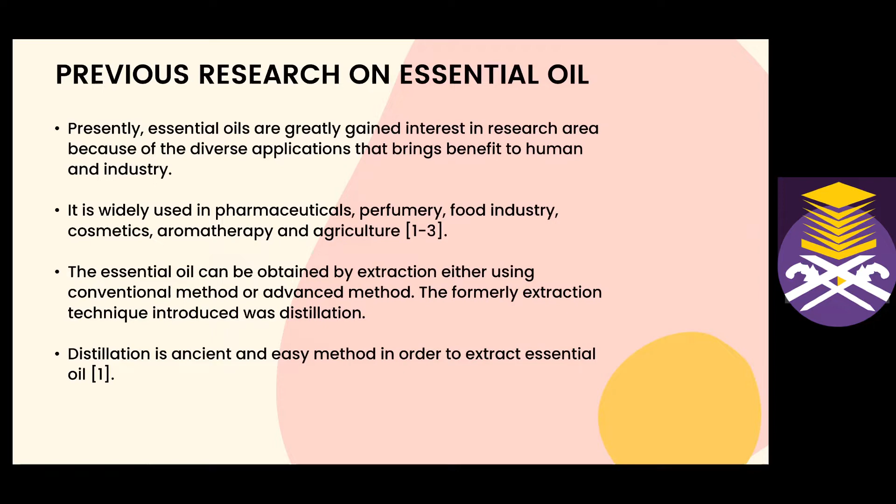The essential oil can be obtained by extraction, either using a conventional method or an advanced method. The earliest extraction technique introduced was distillation. Distillation is an ancient and easy method to extract essential oil. Therefore, distillation is categorized as a conventional extraction that can be accomplished by using hydro or steam distillation.

Okay, this is the previous research on temperature control effort. In extracting essential oils, there are parameters that have to be considered which may affect the yield and also the quality of the pure essential oil. Those parameters are pressure, distillation time, composition of chemical substance, and the size of the raw material. However, the temperature is the most critical parameter that will affect the quality of oils.

The temperature is difficult to handle and control since it experiences non-linear behavior, and moreover, mostly the extraction process was operated under little or no supervision to monitor or control the temperature during the extraction. Therefore, in this study, monitoring temperature control is important in extraction and it is chosen as the process variable for the proposed research.

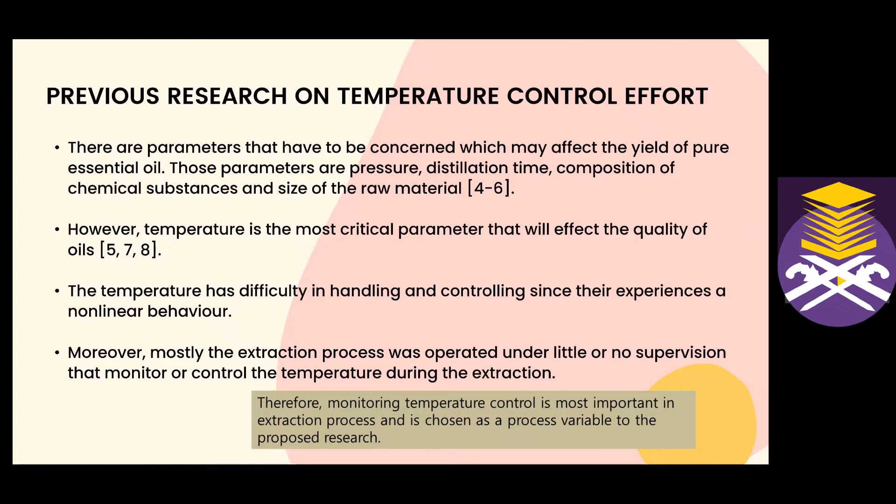Okay, this is the previous research on control strategy. In this study, we are focusing on PID controller and fuzzy logic controller. PID controller is of most interest and has sustained its popularity because of its simplicity and understandable control action. But unfortunately, PID control has some drawbacks, being unable to control processes with large constraints.

Therefore, advanced controllers have been applied to enhance the conventional controller, like fuzzy logic controller, self-tuning fuzzy PID, model predictive control, and other advanced control techniques. So, fuzzy logic controller is an intelligent control strategy that applies linguistic rules, with advantages where it does not require a mathematical model structure and can handle the non-linearity process.

Nevertheless, the fuzzy logic controller has some drawbacks where the tuning is done manually based on the trial and error method, and eventually it is time consuming. Therefore, self-tuning fuzzy PID can further simplify this problem. Self-tuning fuzzy PID is an adaptive control where the PID parameters, which are Kp, Ki, and Kd, are tuned automatically. The altering of the PID parameters is the principle of fuzzy control that acts as a supervisor, which is always attempting to recognize the PID to be tuned properly.

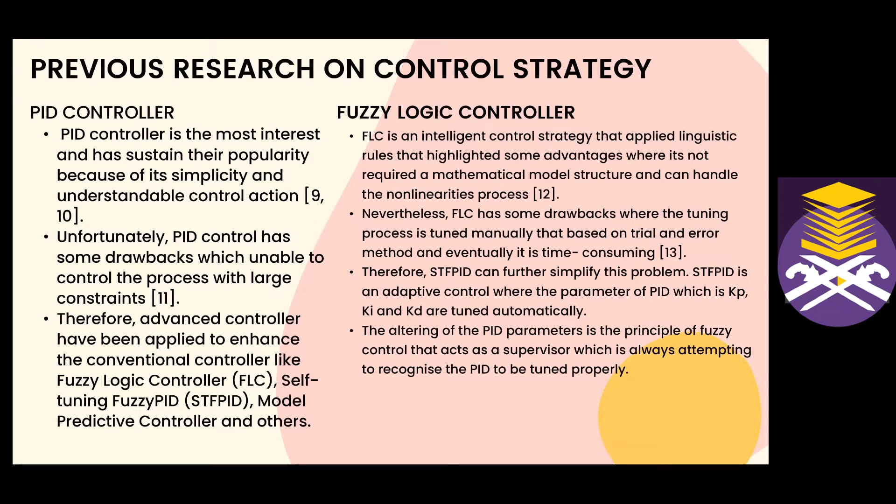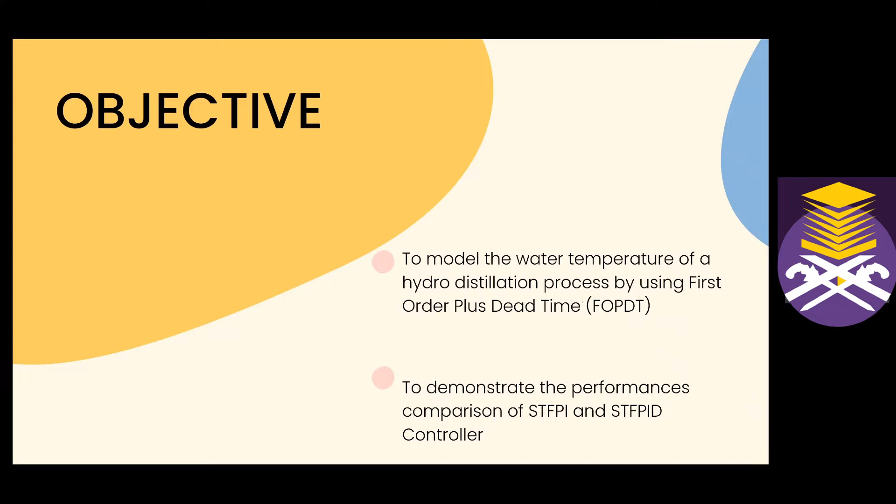So in this study, the objective is to model the water temperature of a hydrodistillation process by using a first order plus dead time, FOPDT, model, and to demonstrate the performance comparison of self-tuning fuzzy PI and also self-tuning fuzzy PID controller.

The background of this study was that an FOPDT model will be constructed to represent the compact hydrodistillation process, and then the PID parameters are acquired to design the self-tuning fuzzy PI and self-tuning fuzzy PID controller. Moreover, the performance comparison of STFPI and STFPID with 25 and 49 fuzzy rules will be analyzed.

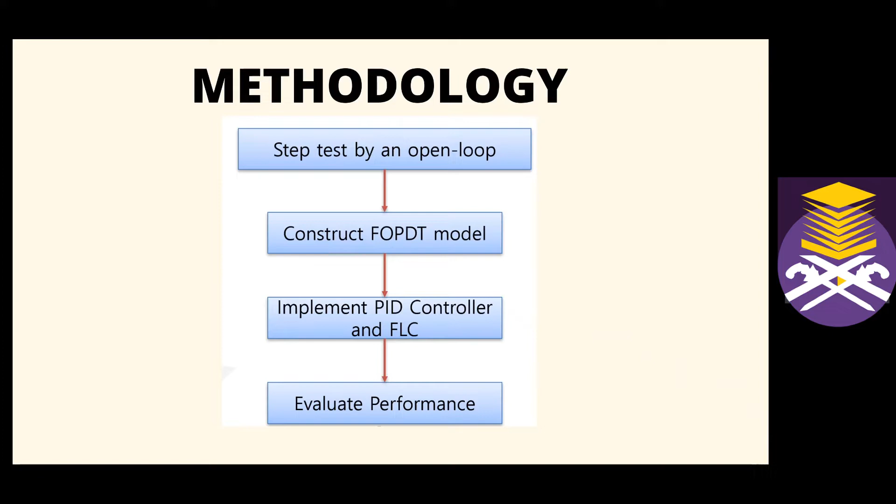So this is the methodology involved in this study. The first step is doing a step test by an open loop experiment, then construct the FOPDT model, then we implement the PID controller and fuzzy logic, and lastly evaluate the performance based on transient response.

From this open loop experiment, the FOPDT model is developed by using the process reaction curve. The process reaction curve was used to obtain the FOPDT model by using the 2-point method, at 28% and 63%. From the process reaction curve, the time constant, time delay, and gain were obtained, and the FOPDT model has been obtained.

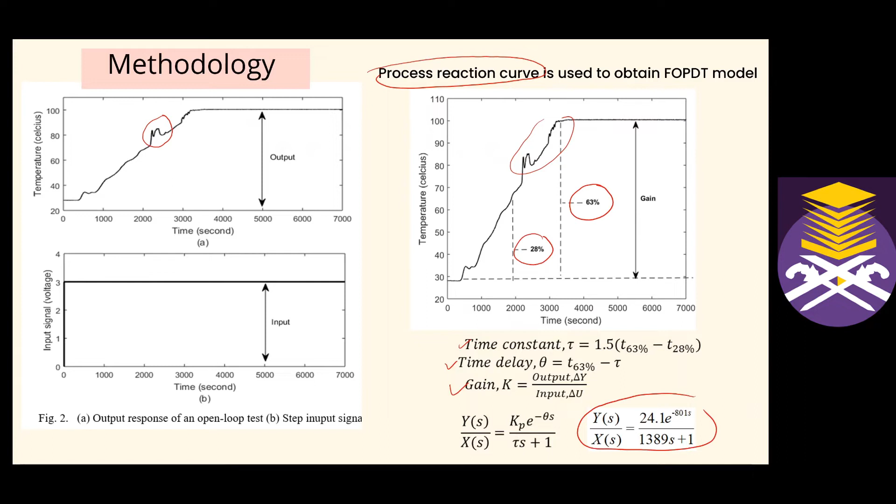So this one is the methodology for the PID controller. As you know, the PID controller consists of 3 terms, which are proportional gain, integral time, and derivative. These terms have their own capability, and achieving the required response majorly depends on those parameters, which will affect the performance of the control process.

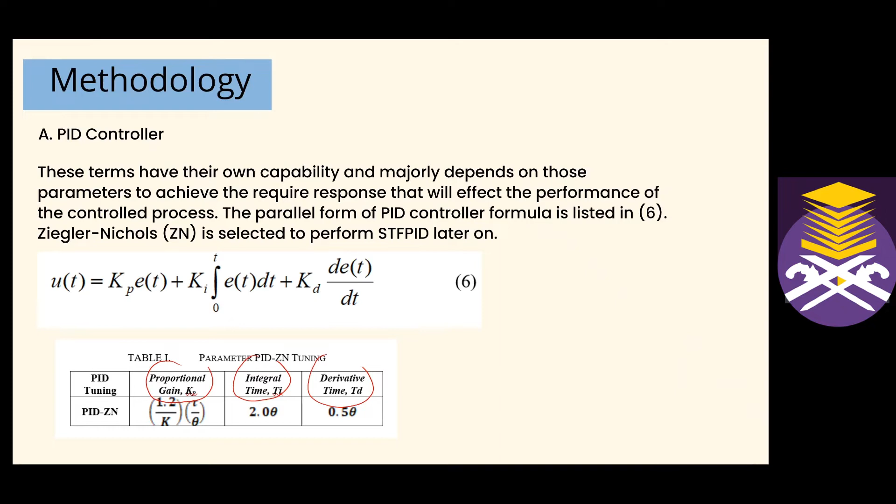In this study, the parallel form of PID controller has been used, as listed in equation 6, and Ziegler-Nichols is selected to perform as the STFPID and also as the STFPI later on.

Okay, this one is the self-tuning fuzzy PID controller. In designing the STF PID, there are 2 inputs involved, which are error and also derivative of error, whereas the outputs are KP, KI, and also KD. This controller is attempting to tune each parameter of the PID. With combination of this controller, fuzzy control will act as a supervisor, meaning that it always attempts to recognize the PID in order to tune the parameters properly.

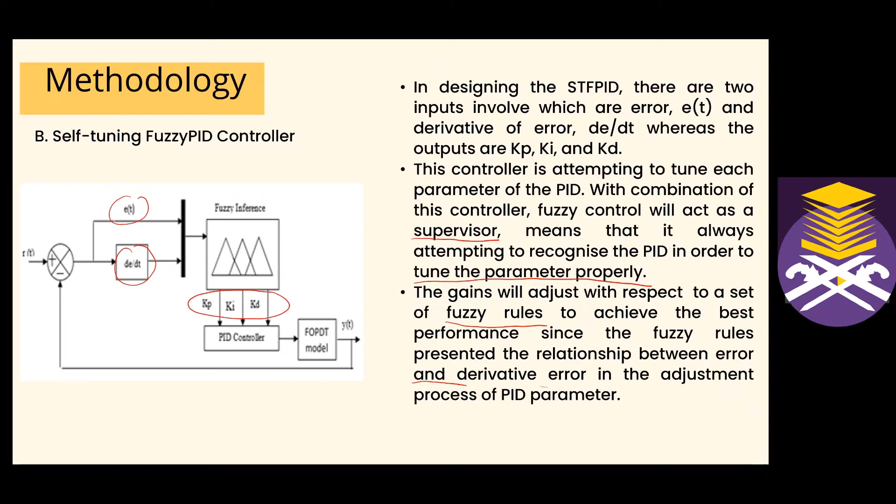The gain will adjust with respect to a set of fuzzy rules to achieve the best performance, since the fuzzy rules present the relationship between error and the derivative error in the adjustment process of PID parameters. As you can see here, figure 5 and figure 6 depict the 7 times 7 and 5 times 5 membership functions of the input fuzzy set for the error, respectively. Here the range is set to -100 to 100 as it represents the full scale of the water temperature.

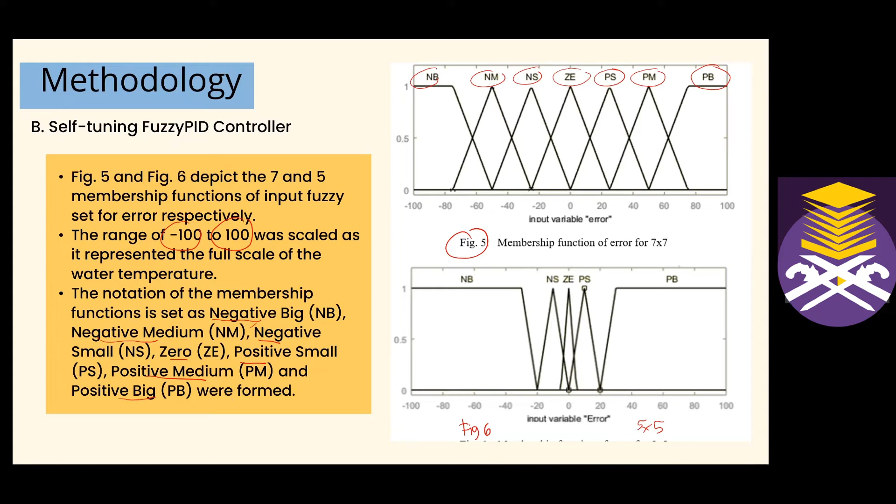So the notation of the membership function, as you can see here, NB, NM, NS, ZE, PS, PM, PB refers to negative big, negative medium, negative small, zero, positive small, positive medium, positive big. And here same goes for the derivative error for 7 times 7 and 5 times 5. The range is -15 to 15 because it is used to eliminate the unwanted noise and fluctuation that generally occur in temperature process control.

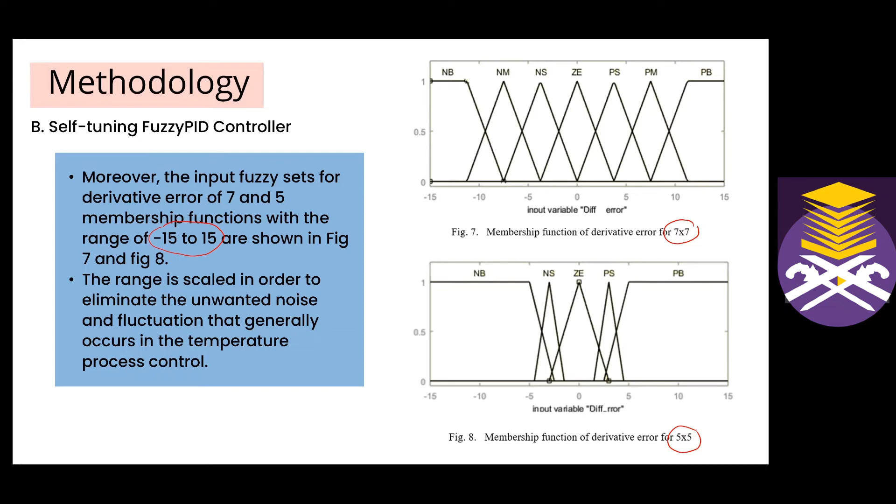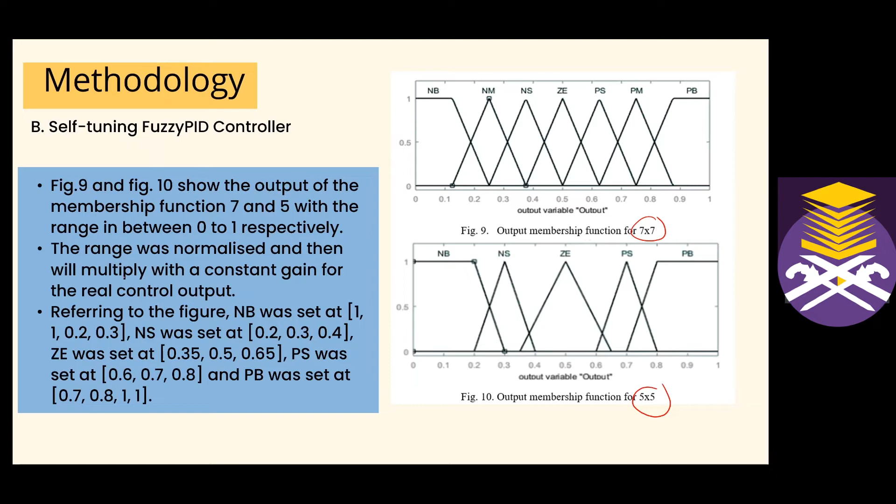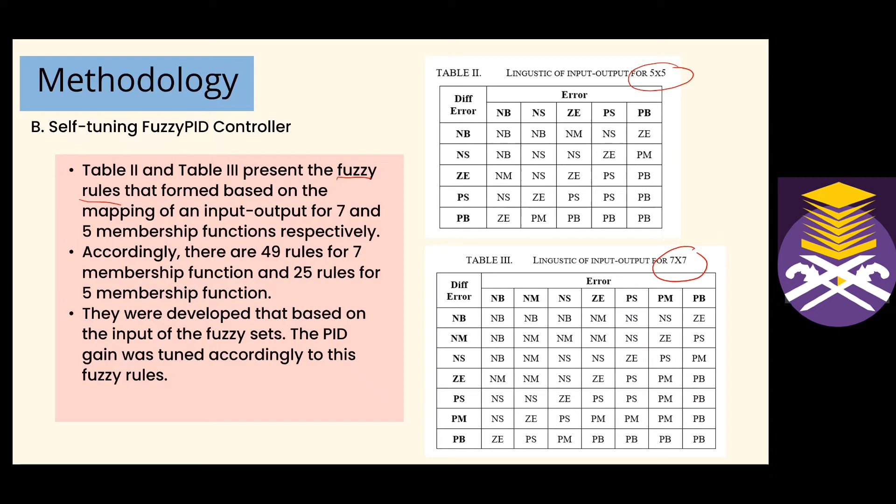This is for the output membership function, for 7 times 7 and 5 times 5. The range was normalized and then multiplied with a constant gain for the real control output. Next is the table for fuzzy rules, based on the mapping of input and output of the membership functions respectively. Accordingly, there are 49 rules for 7 times 7 and 25 rules for 5 membership functions. They were developed based on the input of the fuzzy set, and the PID gain was tuned according to these fuzzy rules.

This part is for results. We have three tests, which are step test, set point change test, and load disturbance test. So look at the step test result. As you can see here, the fuzzy PID membership function successfully performed for all transient response criteria. And for the rise time, it showed that the self-tuning fuzzy PID and PI are not much different, around +2, +4.

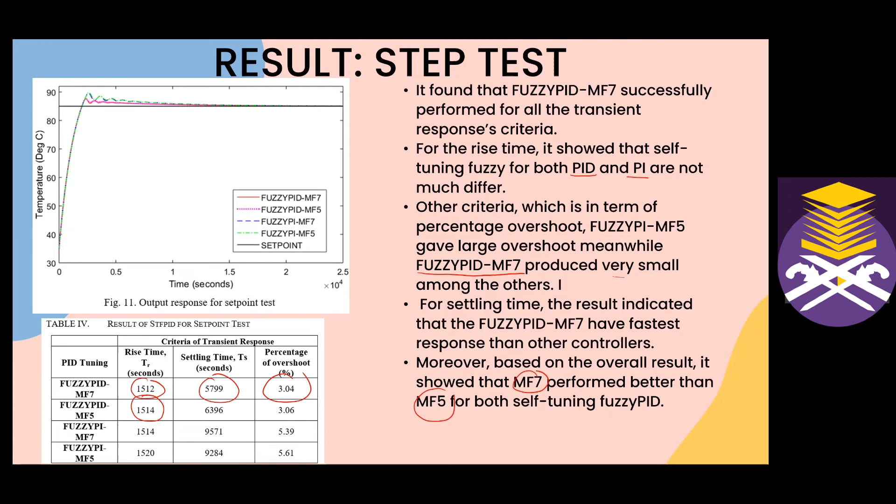Another criterion is percentage overshoot. Fuzzy PI membership function 5 gives large overshoot, meanwhile fuzzy PID membership function 7 produces very small overshoot among the other controllers. For settling time, the result indicates that fuzzy PID membership function has faster response than other controllers. So overall, membership function 7 performs better than membership function 5 for both self-tuning fuzzy PID and PI.

This one is the result for the set point change test. The various operating temperatures were set at 75, 80 and also 85 degrees. Referring to the result, the fuzzy PID membership function is able to fulfill all the transient response criteria, giving faster response in rise time and settling time for all operating temperatures compared to other STF PID and STF PI. Moreover, fuzzy PID membership function 7 gives less percentage overshoot compared to other controllers.

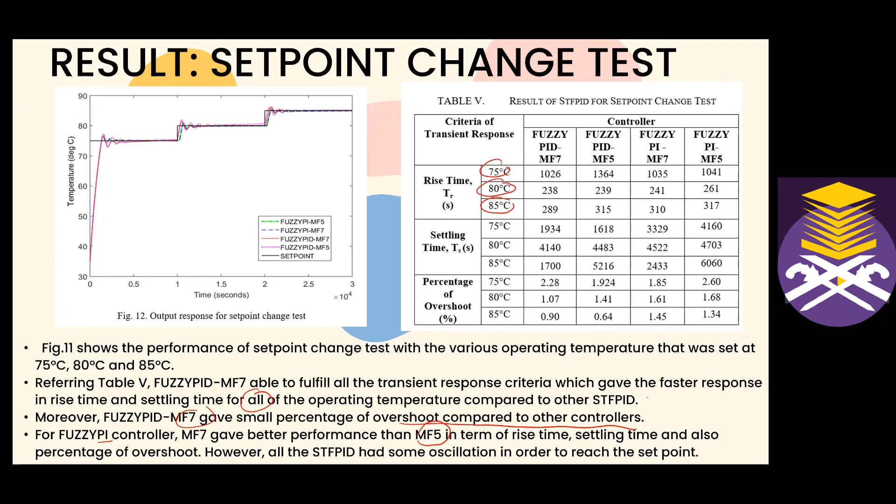For the fuzzy PI controller, membership function 7 gives better performance than membership function 5 in terms of rise time, settling time, and percentage overshoot. However, all the self-tuning fuzzy PID had some oscillation in order to reach the set point.

From the results obtained, the fuzzy PID membership function was able to reach the set point back after undergoing the load disturbance. Moreover, fuzzy PI membership function took the largest time to reach the set point.

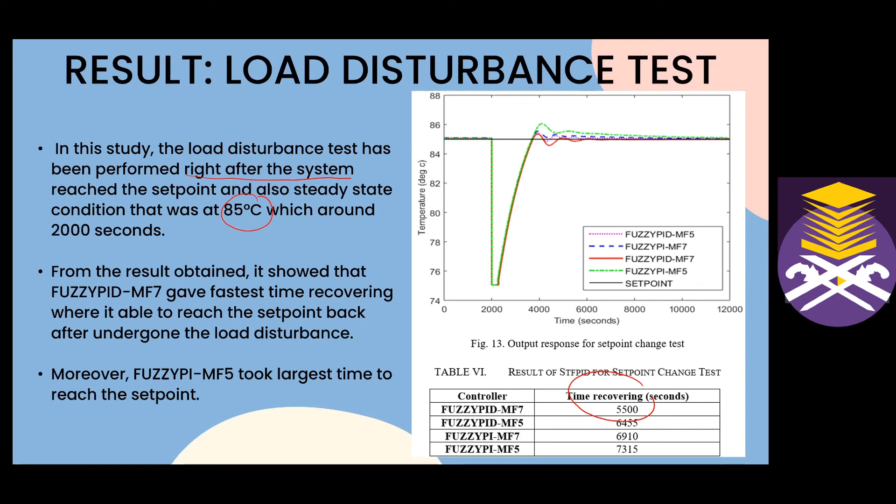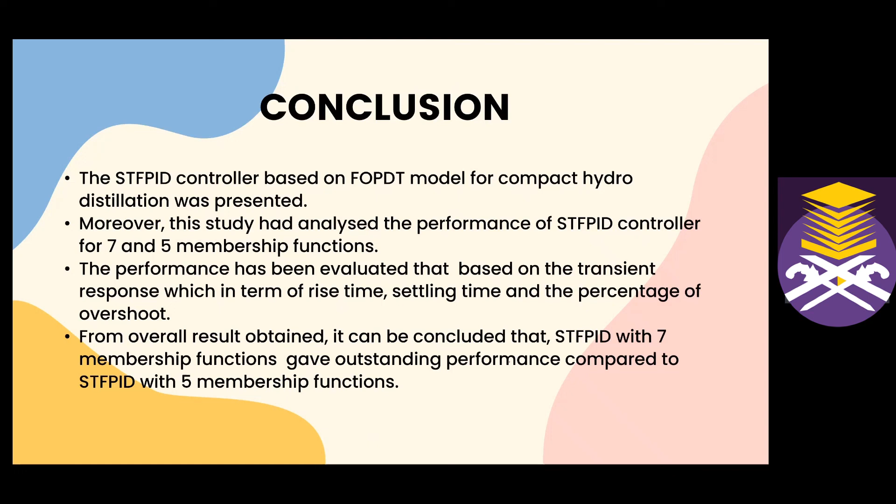For the conclusion, the fuzzy PID controller based on the FOPDT model for compact hydro distillation was presented, and this study analyzed the performance of the self-tuning fuzzy PID controller for 7 and 5 membership functions. The performance was evaluated based on transient response, which is rise time, settling time, and percentage overshoot. It can be concluded that self-tuning fuzzy PID with 7 membership functions gives outstanding performance compared to STF PID with 5, and the same goes for self-tuning fuzzy PI with 7 compared to 5 membership functions.